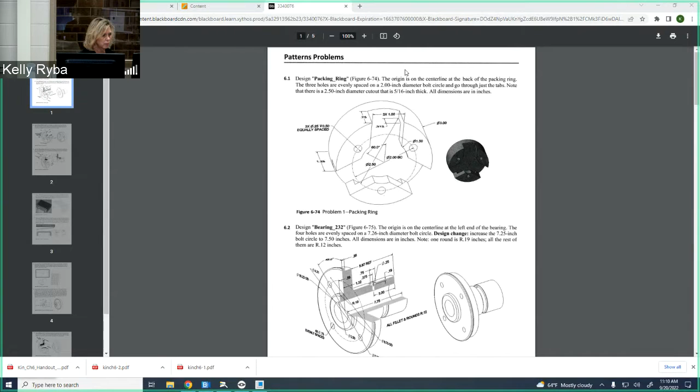And what I wanted to do today is, instead of going to the erector set plate yet and looking at XY-like coordinate arrays, we are instead going to continue to reinforce axis patterns using a couple of the homework assignment problems. So down here are the drawings that you're going to be doing, and I want to make sure that you understand to use the handout. So there's the PDF handout for you if you want to print it off. I have mine printed off here in class. And this packing ring is going to be the first example that we do today.

So make sure that you use this handout, not the end of the book in the Creo Parametric 8.0, because these don't line up with the back of the book, the numbers or all of the names. So I have a handout here for you to be sure that these two correspond. Do not do the back of the book.

Okay, so I already have Creo open. I'm going to set my working directory to my H drive, and then Creo and my Creo 1 2022.

Why am I dinging? Do you know what? Oh, that would be me. Oh, that's you. Okay, giving you warnings. Good. All right. Not that I'm happy you're getting warnings, but I'm glad it's not me.

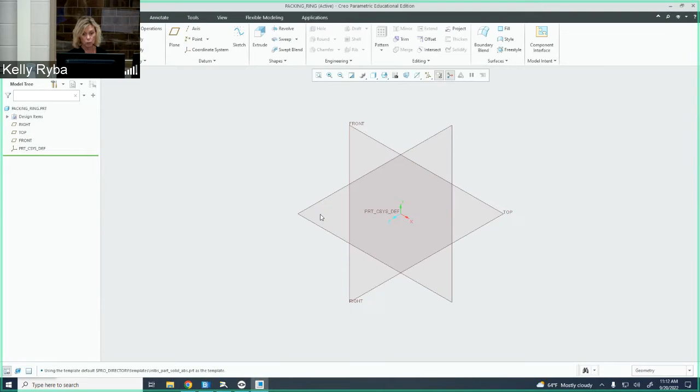Okay, so what I'm going to do is I'm going to start a new part. We're going to call this our packing ring. I'm going to say okay, and we're going to get to our familiar screen. Now, how I'm going to approach this problem is I'm going to create it as a solid disk, if you would, and then cut away the parts that I don't want, and I'm going to be using 2 patterns along the way. So if we look at the part itself, I'm going to create a complete chunk here that's going to be a solid 1 1/4 inch deep.

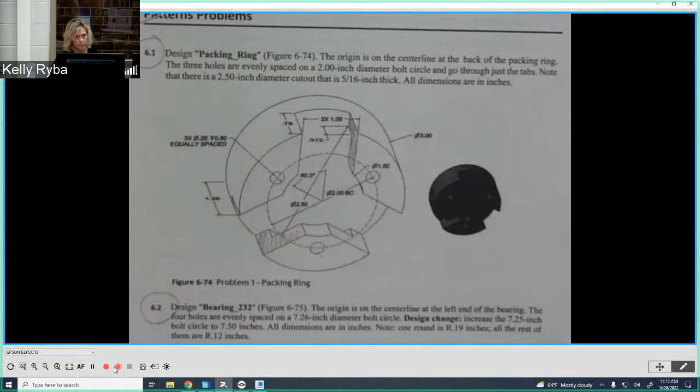Then what I'm going to do is I'm going to create a bore, if you would, on the inside. Take away this portion here. I'm also going to then put a cutout in, and then I'm going to do that as a pattern in three places, and then I'm going to add in the recess that's underneath the back side here. And then the holes are going to go in as a pattern as well.

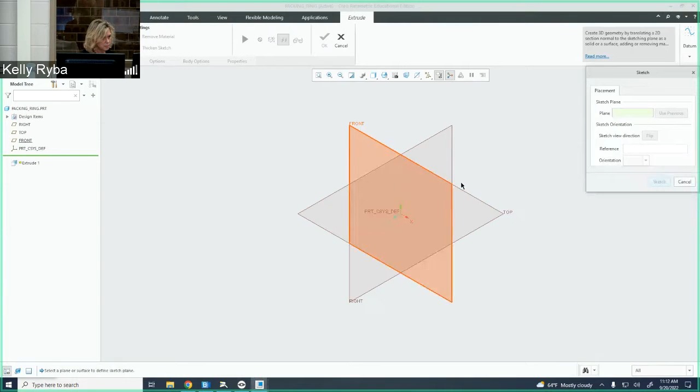So I'm going to start on my top view. Oopsie. I'm going to have to say extrude first. I want to extrude. My definition is going to be on my top view here. And I'm going to say sketch. What I'm going to do is zoom in here to the center, because I know that my circle is going to be pretty small. And I want to make sure that I attach my circle to my origin. So I'm going to grab that origin right there.

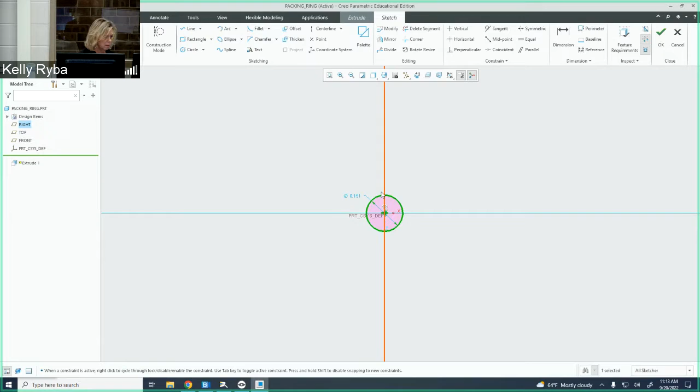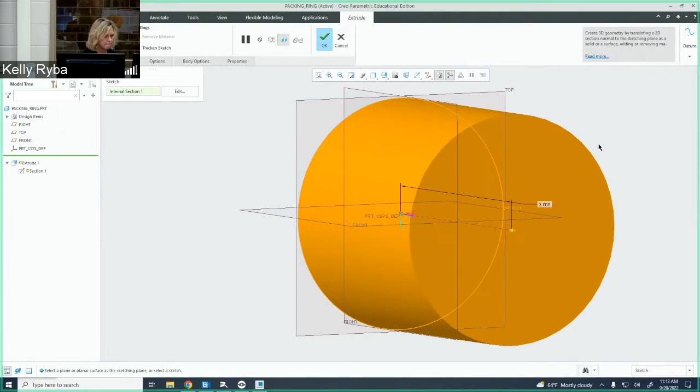Here's my circle. And oh, I'm zoomed way in. So I'm going to click on this. This needs to be 3 inches. So I'm going to zoom out here. And I think this looks pretty good. And we're going to check our features. We look good. I'm going to hit OK. And now what we have is our extrude function. So now I need to put it to the depth that I want it to be. So I'm going to change this from 3 to 1.25 as the overall height. There we go. And that looks good. So I'm going to say okay.

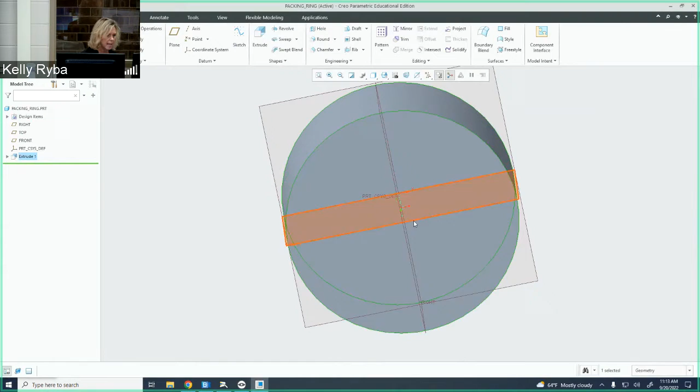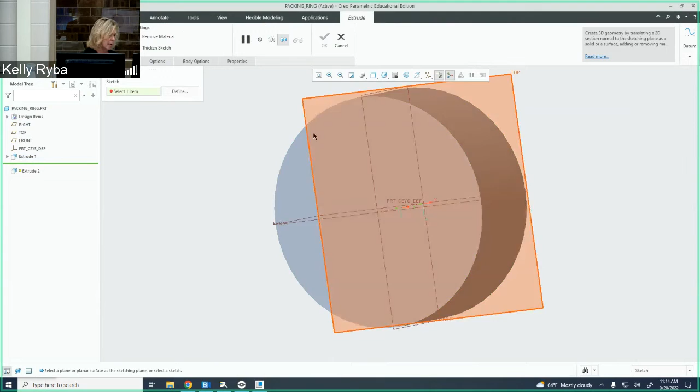All right. So I have in here now a solid disk. Now my work is going to be removing the material that I don't want. And I'm going to start by first putting the circle in the middle here. And it's a diameter circle of, let's see, 1 1/2 inches. Okay, so I'm going to do another extrude. And I'm going to go on this front surface right here. So it's going to rotate the sketch view.

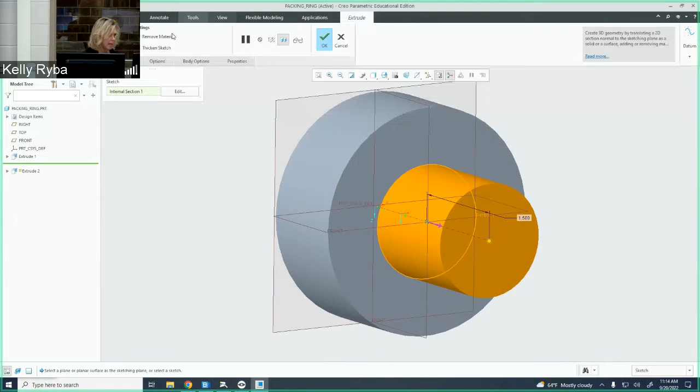I'm going to go back to my origin. And this is going to be 1.5 inches in diameter. And I'm going to say feature requirements. That looks good. And then I'm going to hit OK. Now this one is assuming I want to add; I want to remove, and I need to change the direction. So you need to toggle this so that it goes all the way through.

And this is going to be a through all, not just the depth. Okay. So through all, and I'm going to say, okay, all right. I don't know why it remembered 1.5. I wonder if I keyed in. Now let me do this.

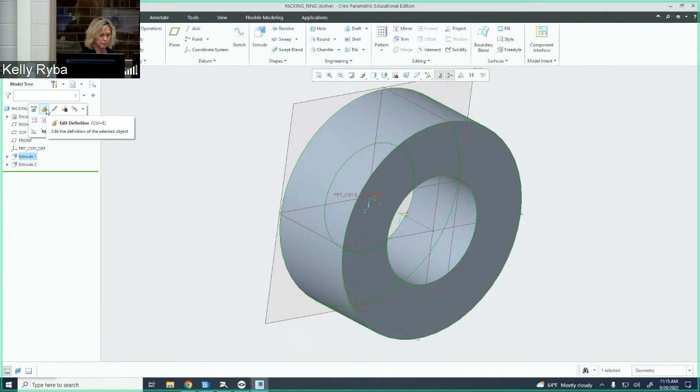Now, let's say I'm like, oh, I want to check that dimension of 1.25. So that was in my first extrude here, okay? So if I go and I click on the extrude, I go back to that original one, and I want to edit its definition, and that's where I put the depth in. Oh, I did put it in as 1.25.

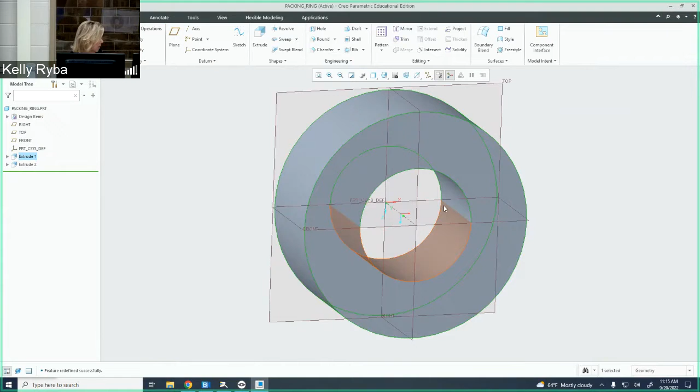Good, because when I went in the second time to do the extrude for the hole, its default was 1.5, and I was a little suspicious that it might have picked up 1.5 for some reason, that I had keyed it in immediately wrong. So it wasn't. I did it through all, so it looks like my geometry and my dimensions are good. Okay.

So now what I want to do is I am going to now add the 1-inch wide cutout. So I'm going to go to extrude again. I'm going to go on this face, and I am going to grab and project the outside diameter here and this diameter right there. Now, right now it's giving me the halves, so I'm going to be putting in the 2 vertical lines here. I'm going to do a cut on that, and then I'm going to pattern that. So not having the full circle projected is totally fine because it's going to that horizontal axis.

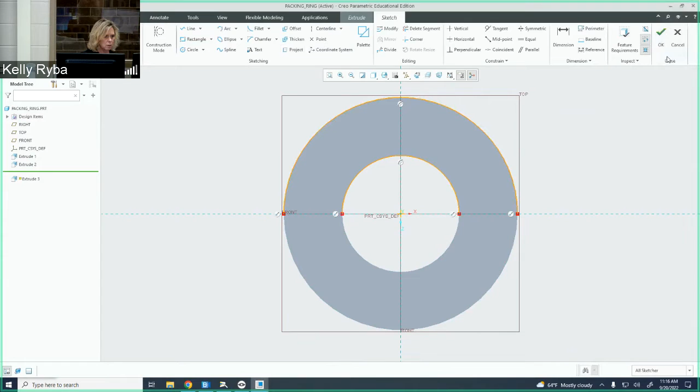So I'm going to hit close here. And now I'm going to add a line, and I'm going to put it here and go vertical up to here, and then middle mouse button to start again, line, and then I'm going to go over here. Notice that when I am over here, it automatically snaps to where it's even with the other side. I'm going to click when it's even, and then notice that it's going to go straight up here.

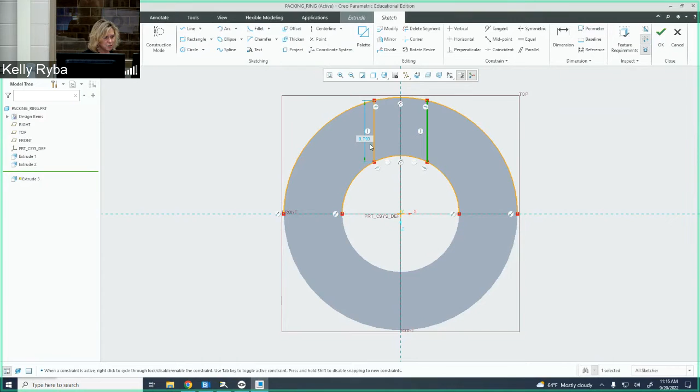Okay. So now what I have is a symmetrical dimension about here, which I do want. I want it to be centered here at 1 inch apart for my cut that I'm going to make. So now I'm going to get rid of what I don't want. So I'm going to get rid of this, and I'm going to be left with that. And now notice that once I hit my middle mouse button, it shades it so that it's an enclosed space.

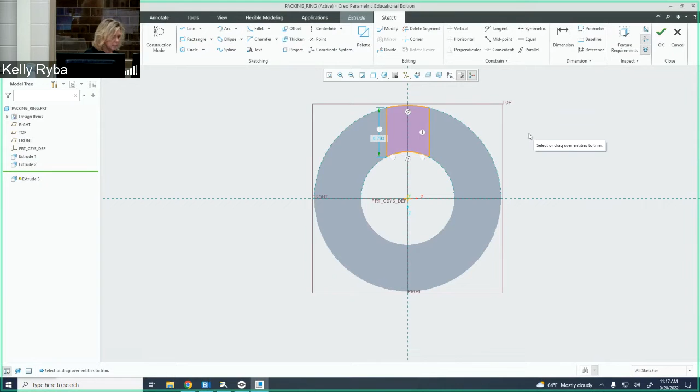The dimension that I want here is actually going to be the dimension between here and here. And I'm going to put it up here. And that needs to be 1 inch. Yep. Okay, so there's my 1 inch. All right, so now I'm just going to double check. Looks like I'm good. I'm going to green check mark.

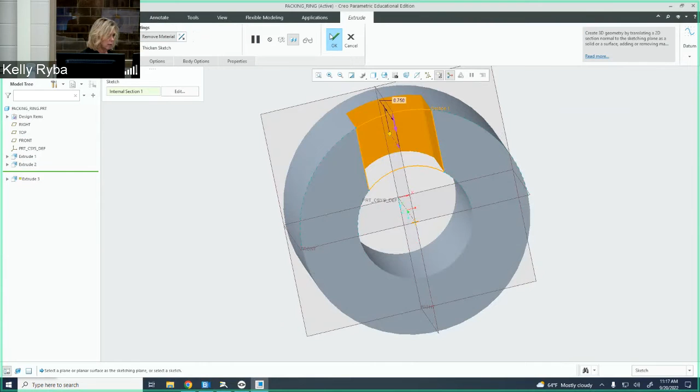It's assuming that I want to add material. I want to remove, and I want to toggle my direction in. And I want this to be to a depth from the top of 0.75. So this is a blind depth of 0.75. There we go. Okay, so there it is. That's 1. So I'm going to hit OK. That looks good. Now, with Extrude 3 highlighted, I am now going to hit the pattern function here.

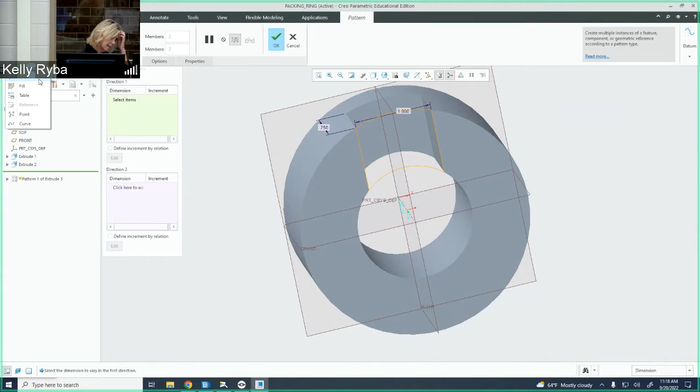Okay. Now, if you're watching this on the replay, I'm up in this upper right-hand corner. Underneath me, there is a dimension. It's like a blue rectangle. There's a triangle in the corner, and you're going to activate that, and you're going to see that there is an option for axis. This is going to be an axis pattern, okay? Now, the first thing we need to do with an axis pattern is select the axis. That's what it's asking for.

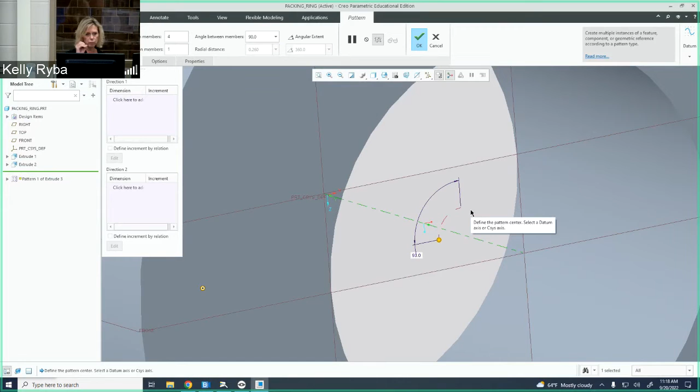So I'm going to select, let me see here, I just make sure I select the one that is going through the center right there. And that's going to be the axis that I'm going to use as my pivot point or my center of rotation for this polar array, if you would, okay? Now I need 3 items, okay? So this is going to be 3.

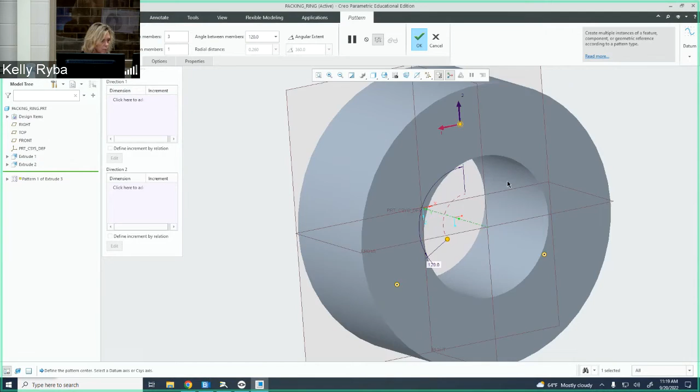And now it assumed 90 degrees between, but I need this evenly dispersed on a full 360. So to get an even, it's going to be 120 degrees between on this one. There we go. And now you're going to notice it doesn't preview the actual feature itself, but it puts these little dots at the center of each one, and that looks correct. So that's all we're going to get from a preview. So I'm going to say, okay, and there you go. I've got my cutout in place, all right?

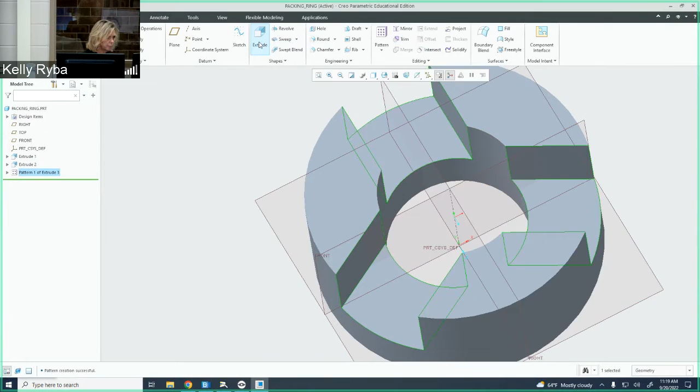Now there's this notch that I have to get out of here. So what I'm going to do now is another extrude, and I'm actually going to select this surface right here because I'm going to draw the circle there, and then cut away from underneath. You'll see what I'm doing in a bit.

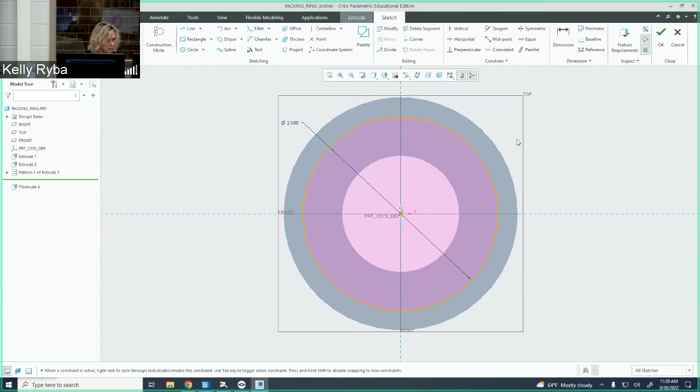From that surface, I am now going to create another circle. I'm going to go on the center, it's going to be like in here-ish. Then I'm going to double click this, and this diameter on the inside is 2.5. The bolt circle is 2. If I look here, notice that where it is, it's on this surface down here, not on the top, it's on this surface right here.

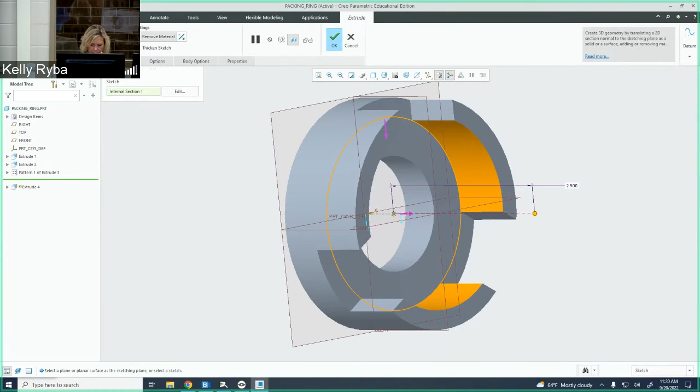So now I'm going to say feature requirements look good, I was anticipating that. Now it wants to add material going through, but I want to do a remove, and I don't want it to remove all of that. I want it to go from that surface up, and that dimension is 0.312.

There we go, so that creates that little shelf. Do you see that in there? So I used one pattern for the cutout, but then I did another extrude remove material to get that feature in there.

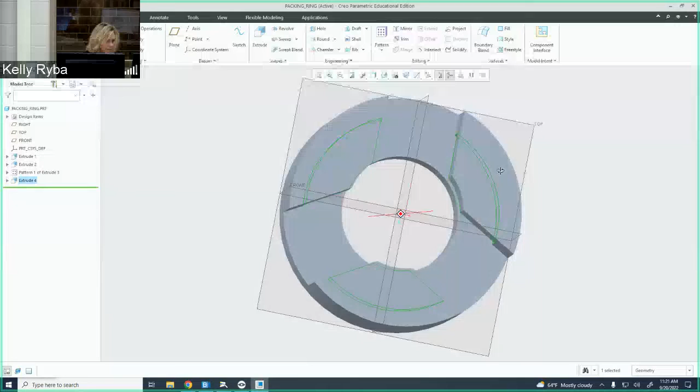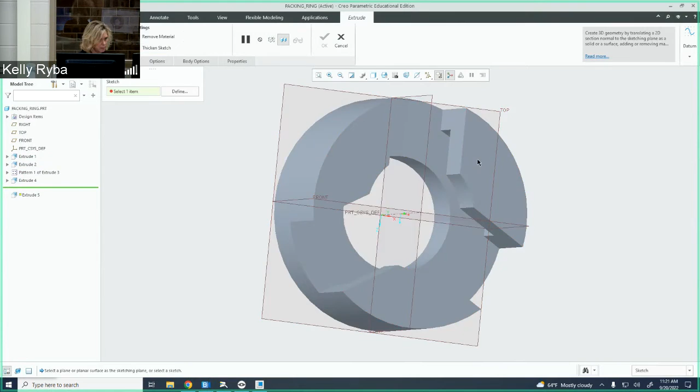And then the last thing I need to do is add my holes. Now this is a little different, I'm going to show you how we use a reference for the bolt circle. So I go into extrude, and we're going to go on the top surface here. I'm going to click that top surface like we normally do, and visually I want to change to shaded with edges so I can see those edges, otherwise it all blends together and I don't see the difference between these.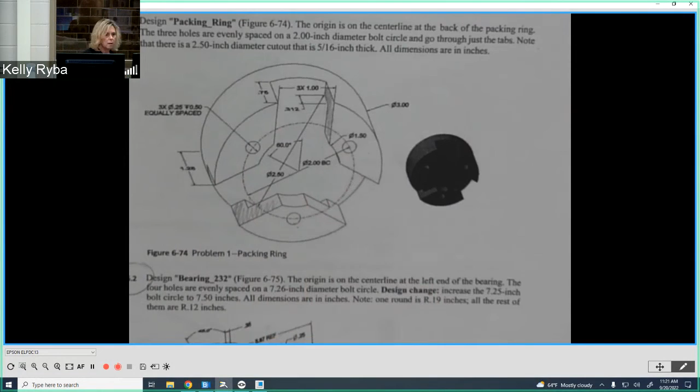Now if we look back at our part, underneath the camera here, I'm going to draw this hole right here because this is going to be the vertical one that I have, and it's going to be on a bolt circle of 2 inches. So my hole is going to be along this line, but it has to be on a 2-inch bolt circle.

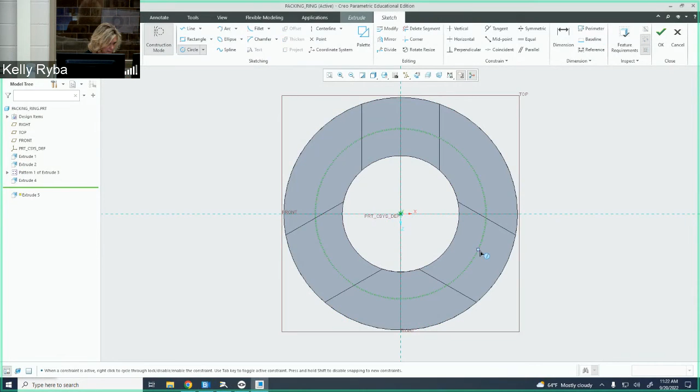So I am going to go into construction mode and draw a circle. I can't do a regular circle because then it's going to want to extrude it, I've got to do a construction circle. I'm going to click on that, start at my origin here, and just kind of go out here. Then it's going to come up with a radius - now this would be a radius. If it's a 2-inch bolt circle, the radius would be 1. Now that's just there.

So now what that offers me is where it intersects with that vertical axis, I can select that intersection. So I'm going to go off construction mode - otherwise everything after you hit construction mode and it's activated blue, everything is in construction. Now I've got to go off of it and put a regular circle, and now notice I can click to that intersection. That diameter is 0.25, and now it's located, I'm good.

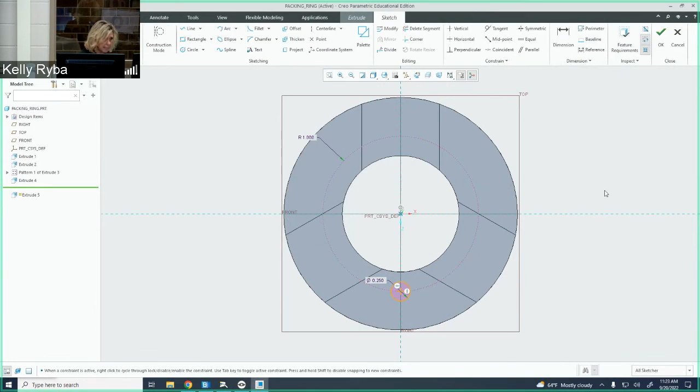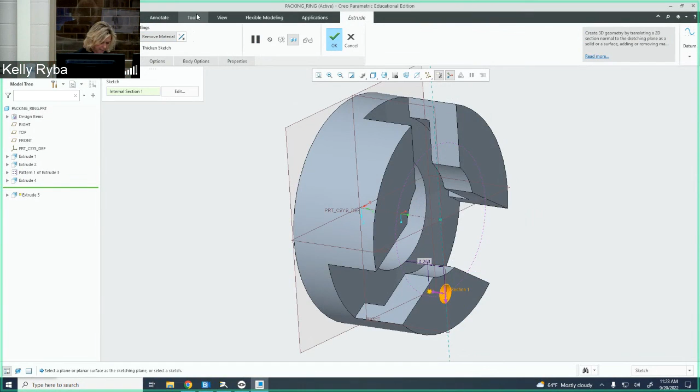So if I look at the feature, I'm all set, I can now do my extrude. And the only thing that circle is there, that bolt circle, is for exactly that - it's for reference only. So I'm going to hit OK. Again, it's going to always want to default to adding material, we want to remove it, we want to toggle so it's at a depth, and that depth according to our sheet here is a half inch, so 0.5.

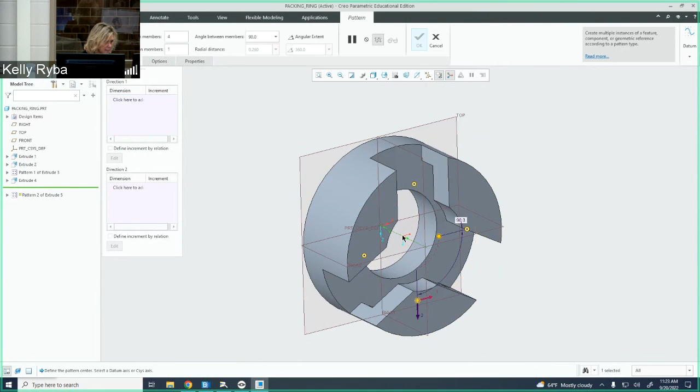So there it is, it's not all the way through, it's just 0.5 deep. So I'm going to hit OK here. Now with extrude 5, which is that hole, that's the one that I want to do the pattern on. So I'm going to do a pattern, arrow down under dimension, do axis, click on the axis that we're going to sum around.

Now it's going to default to 4 and 90 degrees between, but I want 3, because I'm going to rotate 3 of them on each one, and they're going to be 120 apart like the last ones. When I hit enter, we'll see them previewed in location, and that looks good, so I'm going to hit OK.

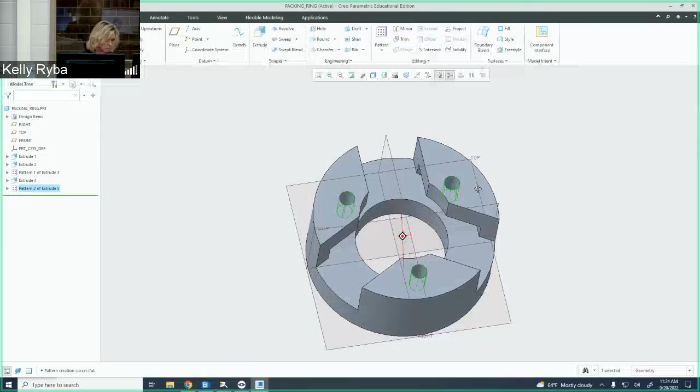And I believe that's all the features that I have. Any questions? All right, cool.